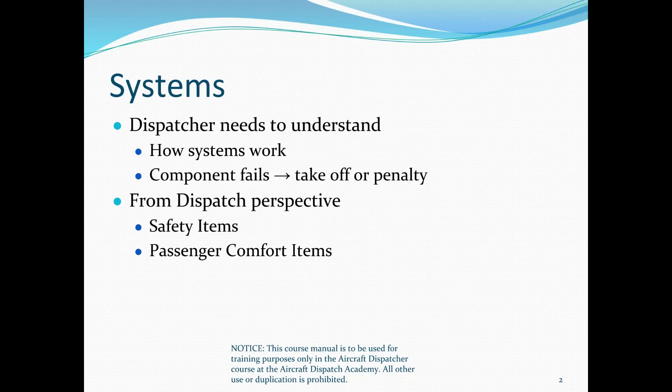So there's certain penalties that affect primarily us dispatchers as far as these failures go. There's times where we actually have to apply something or adjust our flight planning in order to compensate for the failures. So they kind of separate them into two lists of things: is it passenger comfort, or is it a safety of flight issue?

So for bleed air, we talked about this yesterday. It's used for pressurization and anti-ice. When you turn the bleed air systems on, it's like we said yesterday, it's taking that air that's flowing around the engine off the engine. So when that happens, we have a loss of thrust. The engine doesn't produce as much thrust because we're pulling that air off to power those systems.

So the importance of that bleed air is that when we turn the anti-ice on, which prevents ice from adhering to the aircraft, it's a good thing, but it also affects our takeoff roll. We take a weight penalty for it, and we also have altitude restrictions, no icing if it goes out. So it's a pretty bad scenario when those pneumatic systems and the bleed air systems go out of service.

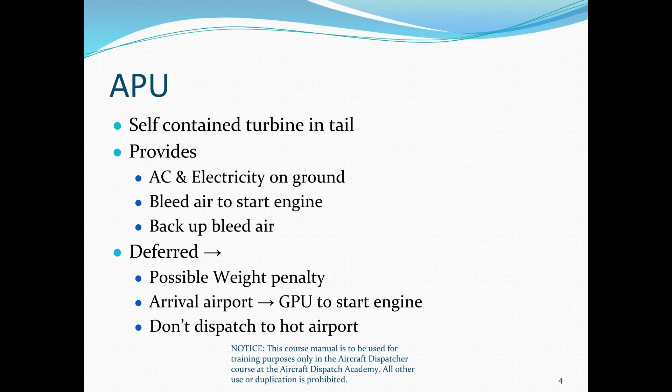We don't have that backup power, but we also don't have the air conditioning on the ground. So it's a pretty bad day if you're in Phoenix and it's 115 outside and you don't have that AC running on the passengers.

So the AC packs, once again, provide that pressurization. The bleed air is routed to the pack and removes the water, then it provides that AC and pressurization centralized in the pack. One pack can basically take over if there is a pack deferred, but if there is one pack deferred, that restricts the altitude we can fly up to.

So we'll take performance penalties, we'll take fuel penalties, basically performance kind of equals fuel, right? If we're flying down at flight level 200 instead of flight level 320, it's a huge performance hit, so we're going to be burning a lot more fuel down low. And the air conditioning's not as effective.

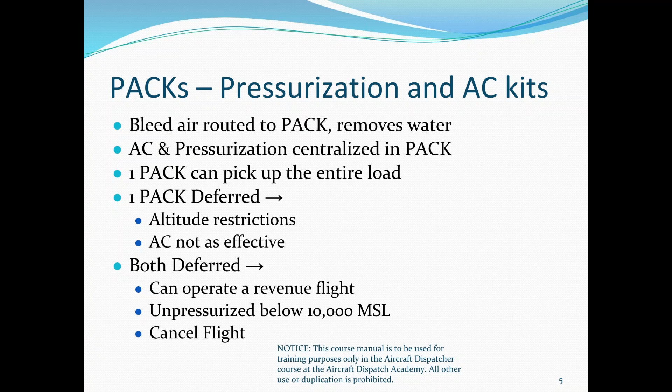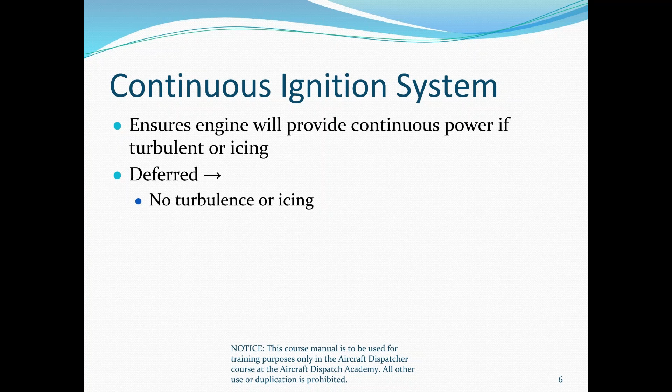So the CIS, or continuous ignition system, ensures the engine will provide continuous power if turbulent or icing. If it's deferred, basically we can't go into known turbulence or icing. So, pretty bad day.

As far as the electrical goes, like I said before, the IDG, integrated drive generators, we always have to have at least one working. That's pretty important. When one is deferred, the APU has to continuously run in flight to help manage the electrical load.

We take a huge performance penalty, and there's an altitude restriction. For the 200s, it basically restricts us—we can't start it any higher than 31,000 feet or 29,000 feet, I can't remember. And then we have to fly it like 25,000 feet once it's on.

So if we have an IDG failure in flight, they've got to get down to that 25,000 foot mark, or else we get additional failures on top of that. So APU, IDG, pretty important parts of the aircraft.

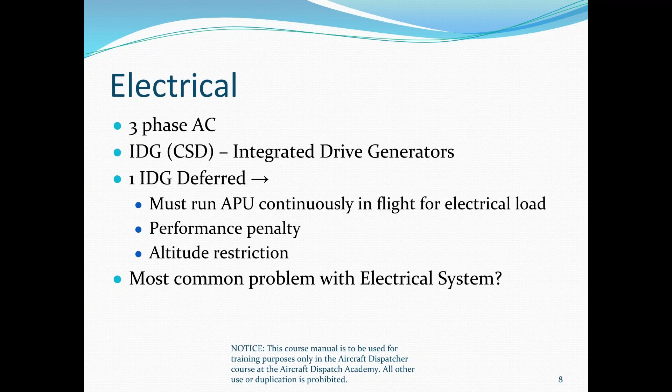As far as the fuel system, if that single point refueling mechanism is deferred, which it can be, like we said yesterday, you have to do over the wing fueling, and you need qualified people to do that. You need ladders, things like that. So some airports don't necessarily carry all of that stuff, and you need to make sure we're equipped to refuel the aircraft if there is a deferred single point refueling system.

And then, like we said before, you can't fill the center tank if that single point refueling valve is deferred. So we take fuel penalties in that case.

We can have navigation equipment, other equipment in the cockpit deferred. Here's kind of the penalties. For our weather radar, we can't dispatch into thunderstorms or hazardous weather. If our FMS is deferred, we can't use GPS, which means no RNAV routes, no GPS navigation at all.

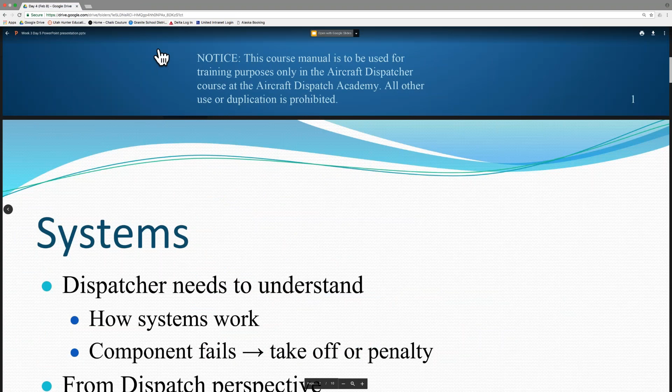All right, so let's see. So now we're going to take a look at this MEL CDL manual. What's a CDL? Does anybody know?

Can't remember. Jordan, do you know what a CDL is? I don't think so, I thought it was a license to drive a semi truck. Close, you're not wrong in that answer. There we go, Evan's got it.

Configuration deviation list. So basically it's telling us what can be missing. An MEL is a minimum equipment list, which tells us if this isn't operating, this has to be working. A configuration deviation list means that, say there's something structural with the aircraft, or there's certain seals that need to be on the aircraft. A configuration deviation says there's this many seals that are allowed to be missing out of this many, and if that happens, then you have to take a weight penalty here, or things of that nature.

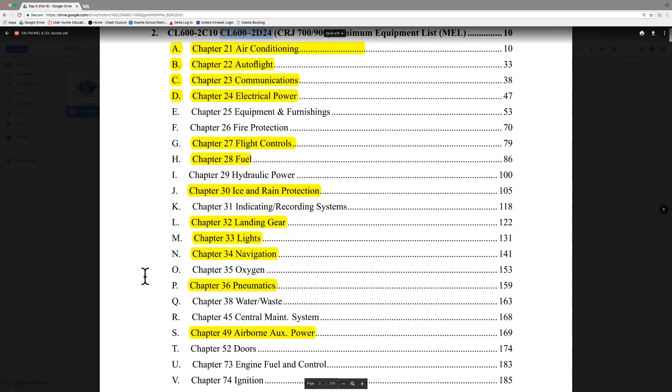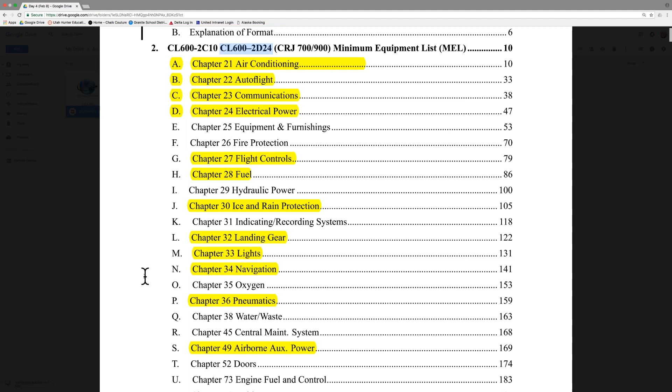This kind of goes through - this is when you're doing dispatch. This is going to be one of your favorite parts of every book, this index, and it tells us what chapters cover which parts of the aircraft. The ones that we highlighted here are 90% of the time going to be the ones that when we start flight planning, if we give you guys an MEL, these are the chapters that you'd go to find those MELs. So when we start flight planning, you guys will become very familiar with this manual.

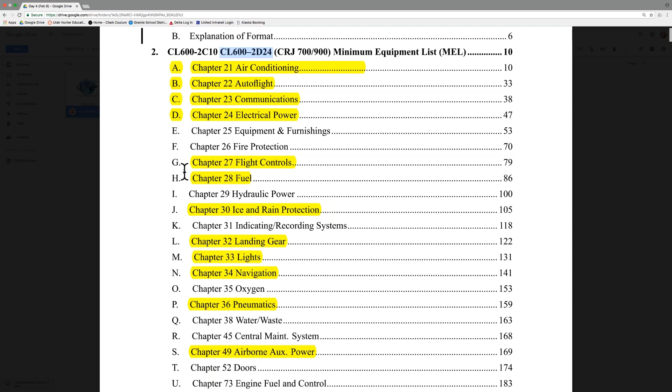On your practical test, a lot of times it depends, but you could be given any one of these, any list of problems, and basically you have to make sure you apply them, because if you don't apply the MELs correctly, that's a FAR violation and could mean an automatic fail. It just depends on what it is. Not to scare anybody, you guys will be so good at flight planning that it won't be a problem.

So this just kind of goes over an explanation of the format of the MELs. We're going to go over this. The system numbers, or MEL block, are based on the ATA specification number and numbered sequentially. Kind of common sense.

If there is a bold Cat 2 in the box with the item deferral list of the system, it also requires us to downgrade from a Cat 2 status. This doesn't apply to you guys as much because we won't be doing Cat 2 approaches in this class. But basically what it's saying is that if there's a Cat 2 in bold letters on the MEL box, then there's a penalty or restriction that means we can't do our Cat 2 approach.

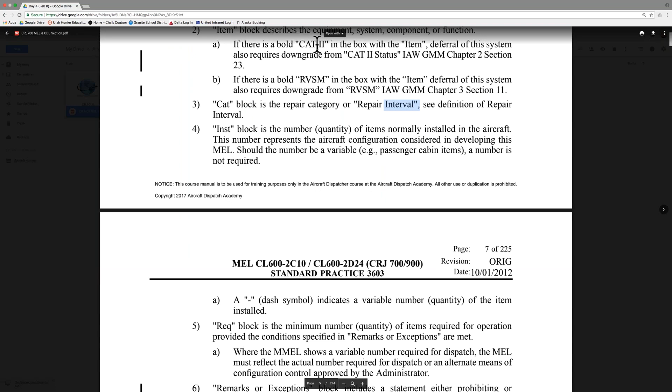And the same thing goes with RVSM. So if you see an RVSM or a Cat 2 on the MEL, that means you won't be able to fly that approach or fly in RVSM airspace. So just kind of skim through this.

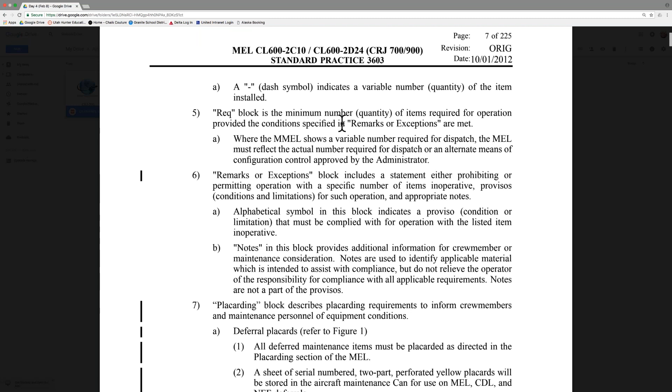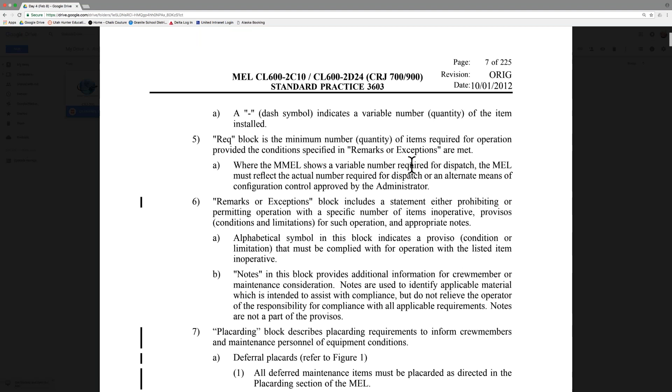So the required block is the minimum number of items required for the operation provided, and the conditions specified in the remarks exceptions are met. We're going to take a look at some of these blocks, but basically all this is saying is that if there's multiple systems on the aircraft, like 2 IDGs, it will notate how many of them have to be working in order to be legal to dispatch.

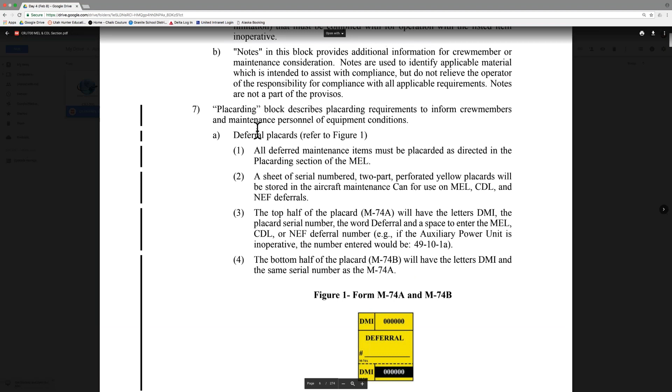There's a remarks or exceptions block that includes a statement of either prohibiting or permitting operation with the specific numbers of items inoperative, provisos for such operation, and appropriate notes. So basically it's saying that there's a block that we'll see that will tell us what maintenance has to do, in order to keep the aircraft operating, whether that's put a tag on something, or if it's a seat, put a sign on the seat that says don't sit here, or whatever it is.

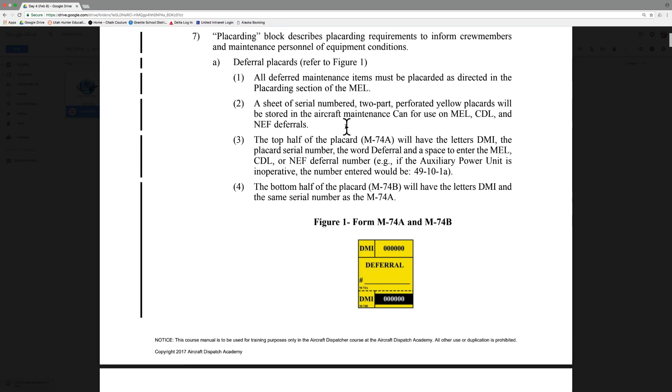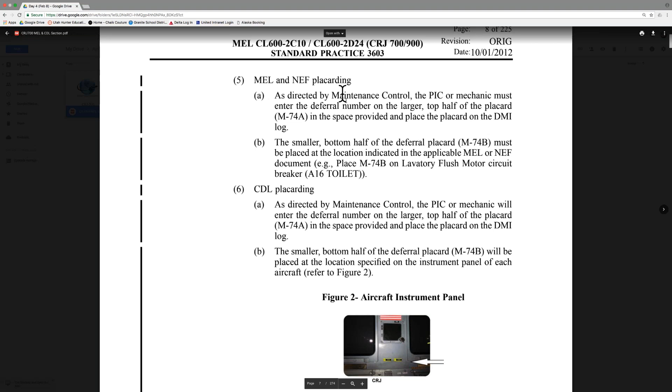So placarding, it also has a placarding box that we'll see, and it'll tell the maintenance people what sign, what form they have to use in order to indicate that the item isn't working. Yeah, this just kind of goes over the maintenance steps as far as placarding and CDL steps. So not too pertinent to what we do.

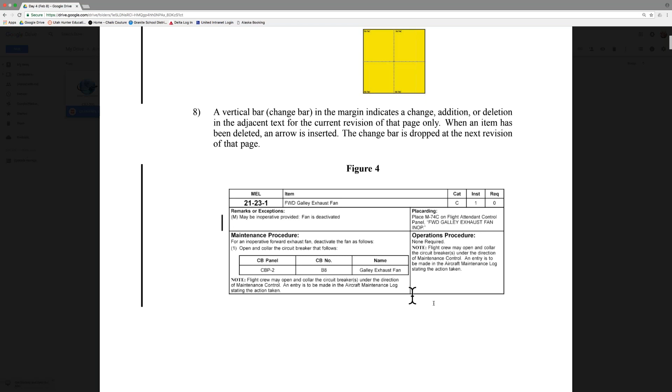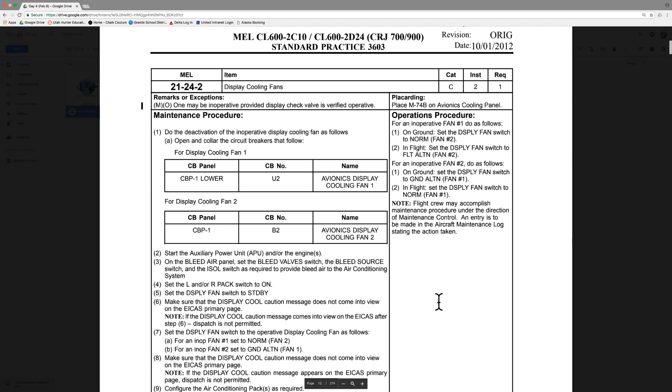So for this MEL, operations procedures is where it'll tell us certain penalties or restrictions that the flight crew needs to follow in order to operate. So these are our MELs. We'll just kind of hit a couple of these MELs, take a look at them. Let's see. This one's kind of interesting.

So these display cooling fans, these are for those PFD, MFDs. Some of the interesting things that happen is in the QRH, the pilot's operating handbook, or the quick reference handbook that the pilot carries with them. Basically, if one of these fans goes out on the back of the display, they have, I think they said 30 minutes to get the plane on the ground. Kind of interesting, because if one of those displays goes out, it's a pretty bad day. Pilot has to be able to see the instrumentation, right?

Here's one that takes a penalty: the automatic cabin pressurization controllers. As we said before, there are penalties and certain things we have to do, and it's going to be in this remarks and/or exceptions box. So for us dispatchers, what we have to apply to the flight plan is basically operations are conducted unpressurized at or below 10,000 feet.

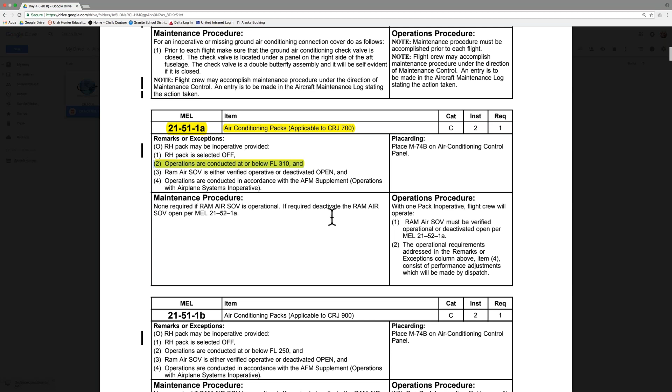Does anybody have any questions about these so far? You guys are seriously like the quietest class in the history of dispatch school. My boyfriend usually comes home and takes a nap in the same room I'm in, so I try not to be too loud. You're fine, otherwise I'm pretty talkative. For me it's all new, so I'm just trying to take it in. That's I all hear you. Yeah, what he said.

Here's an interesting one, the cargo air valve. Basically it allows the airflow down into the cargo area, I believe that's what that's referring to. Yeah, the air conditioning, it allows the air conditioning down into the cargo bay. It basically says that if this isn't working, you can't carry animals down in that aft cargo compartment.

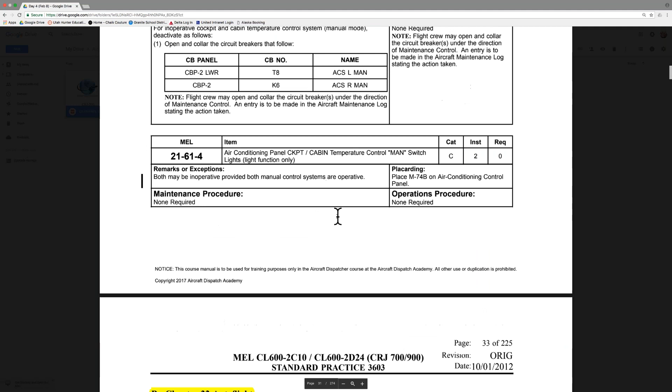Autopilot - so we see this note here. RVSM autopilot is required for RVSM. You can see here RVSM Cat 2 in big bold letters, so that's your first sign to pay attention to this MEL. But then we see this operations procedure as well: we can't do Cat 2 or RVSM, fly an RVSM, without an autopilot system.

The flight directors, once again, RVSM and Cat 2. You see that here, the Cat 2 flight directors. I know the flight directors are always tied to autopilot, but can't you also have flight directors manually flying?

Yeah, so the flight director is just that, it's just a guidance thing. You can see it here in this operations procedure: basically the pilot controlling the aircraft has to have an operative flight director.

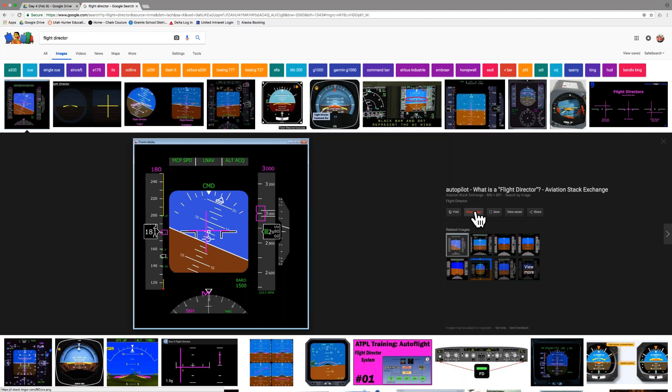There's little pink markers. I can pull up what a flight director looks like. So you can see here, let's make it big. If this is inoperative, these pink markers are what the autopilot is set to.

So if this display is broken, how is the pilot going to have reference to that? Not only that, but look at how much information this is supplying the pilot. Anybody that's flown a Cessna or anything has probably flown what we call steam gauges, which are individual manual gauges. But this is giving all the pertinent information for the flight.

This is our vertical speed indicator. This is our altimeter, this is our altimeter setting. This is our attitude, trying to remember what it's called in the steam gauges. This is basically our attitude situation indicator, I can't remember what it's called right now. This is our speed indicator. And this is our heading indicator. So this is quite a bit of information all in one little screen.

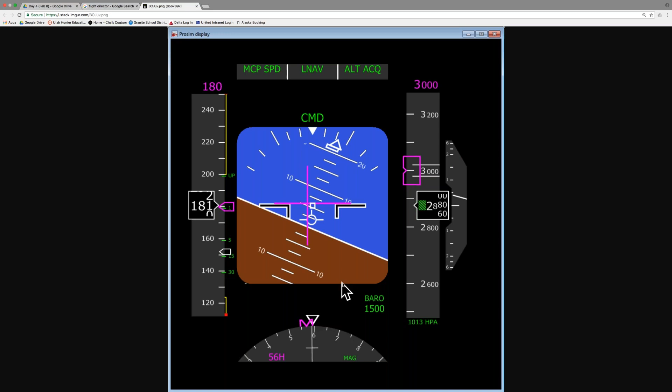Pretty bad if that goes out. The pilot has no references to where they're at. If one of these displays goes out prior to takeoff, we can't even take off.

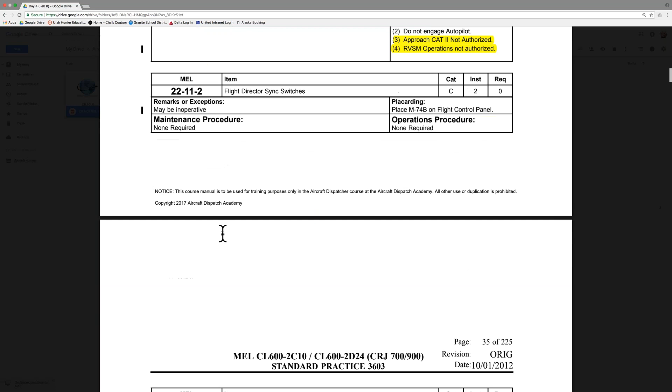Like we can't take off with that known issue. Once again, here's Cat 2 all by itself. Once again, the Cat 2 approach is not authorized. Yaw dampers. Category 2 is not authorized.

So our ACARS - if the ACARS is deferred, then like I said before, if one of our VHF radios goes out, we can use the ACARS system, the VHF radio that basically communicates our ACARS messages. The pilots can use that, and if that happens, then the ACARS is deferred. The way we would contact our pilots in that scenario would be with Delta radio, or Atlanta radio. Then it also tells us that our off, on, out, in times have to be reported by the gate pretty much. So that's how we get our information.

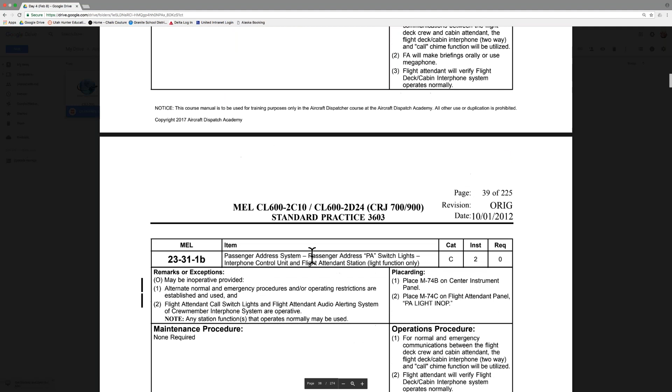You guys have any questions about these so far? Not yet. No, sir.

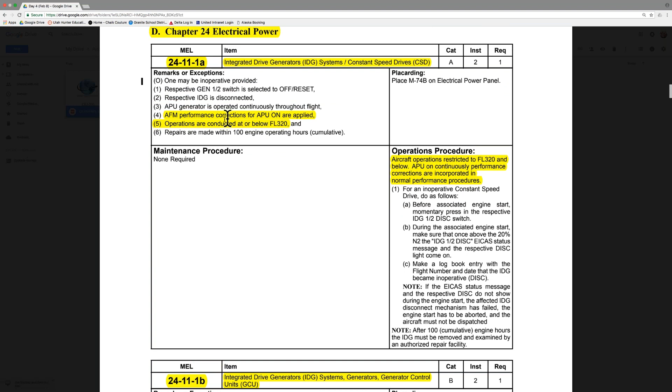So here's the IDGs. This says 320, I know that's changed, I know it's a lot lower than that now. That may be for the 200 though.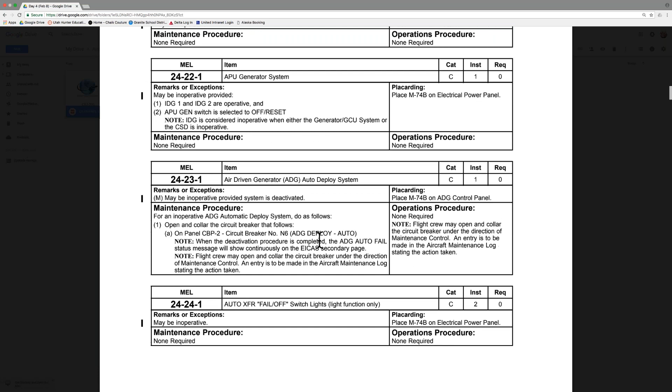So here's your APU. Your APU can go inop, but both IDGs have to be operative - that's pretty important - or air-driven generator. Just basically can't use the system. So, anyways.

It's kind of interesting. This just goes through everything, all these MELs. I mean, you can see how minor some of the stuff may seem, but like the flight attendant seat assembly - may seem minor, but there's a procedure that we have to follow if their seat is broken. So this tells us how to operate.

Just for application purposes, what's the most recent one you've seen at work that had a decent impact on you? Me personally, I can't think of any, but you get MELs every single day. Had a MEL - trying to remember, can't remember the specifics of it - the MEL basically made it illegal to go, so you had to swap aircraft at that point, or cancel the flight.

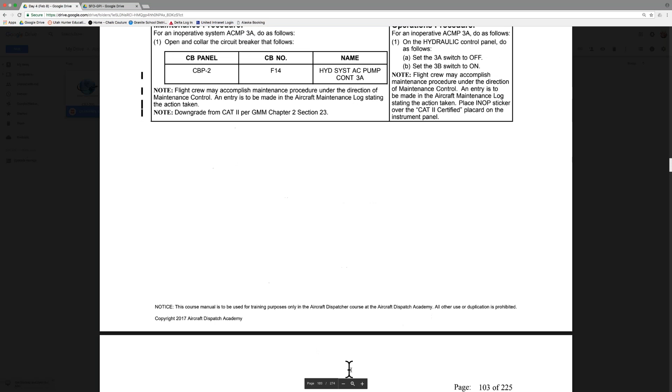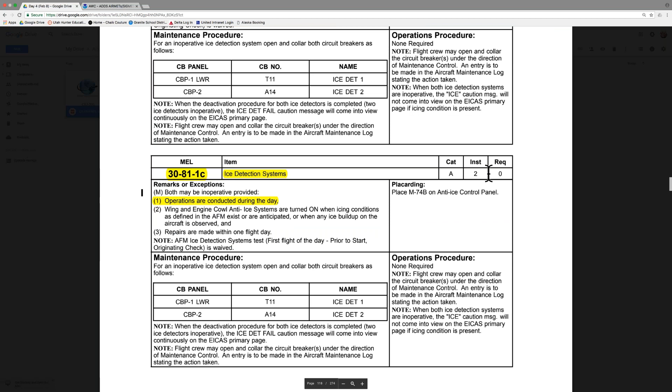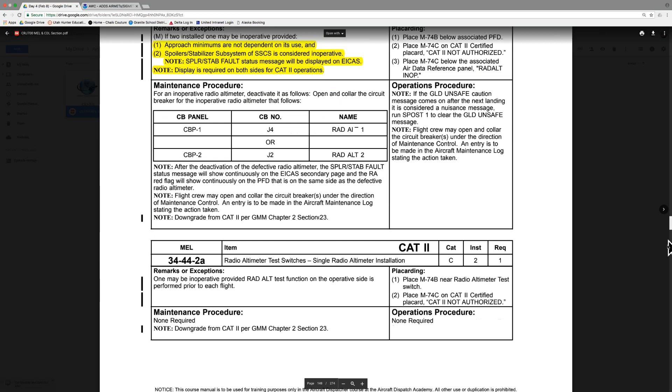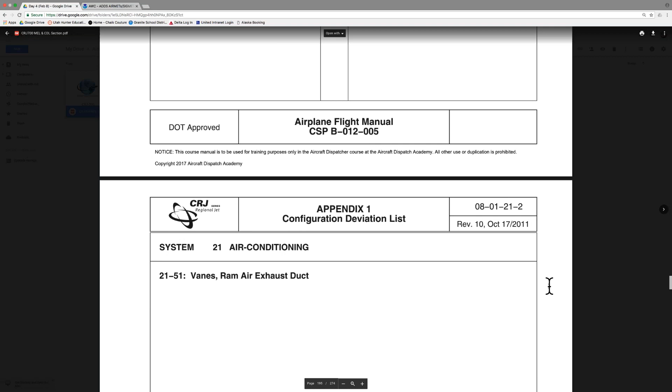So let's see if I can scroll a little more quickly down here. Let's see if we get some CDLs. Here we go. Nope, still in. I don't know where the CDLs are supposed to start. There you go, so these are your CDLs.

So this just kind of goes over our general limitations. The CDL contains additional limitations for operation without certain secondary airframe or nacelle parts. The limitations in flight in the AFM are applicable except as amended in this appendix.

The associated limitations must be listed or placarded on a placard affixed to the flight compartment on the instrument panel in clear view of both pilots. The pilot in command will be notified of each operation with a missing part by listing the missing parts on the flight or dispatch release. The operator will list in the aircraft logbook an appropriate notation covering the missing parts of each flight.

If an additional part is lost in flight, the airplane may not depart the airport at which it landed following this event until it again complies with the limitations of this appendix. This, of course, does not preclude the issuance of a ferry permit to allow the airplane to be flown to a point where the necessary repairs or replacements can be made.

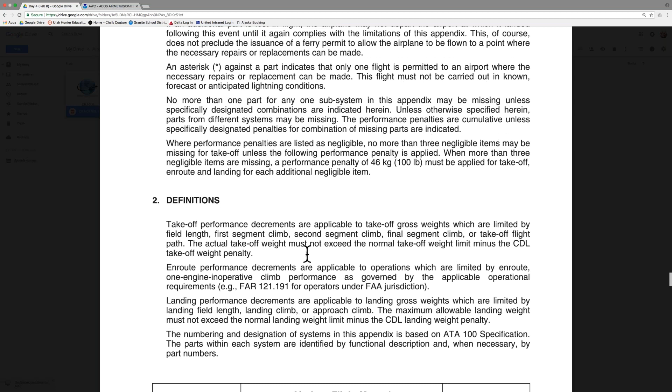But here's kind of an interesting part of the CDLs. When a performance penalty, or where performance penalties are listed as negligible, no more than 3 negligible items may be missing for takeoff unless the following performance penalty is applied. When more than 3 negligible items are missing, the performance penalty of 100 pounds must be applied for takeoff, en route, and landing for each additional negligible item.

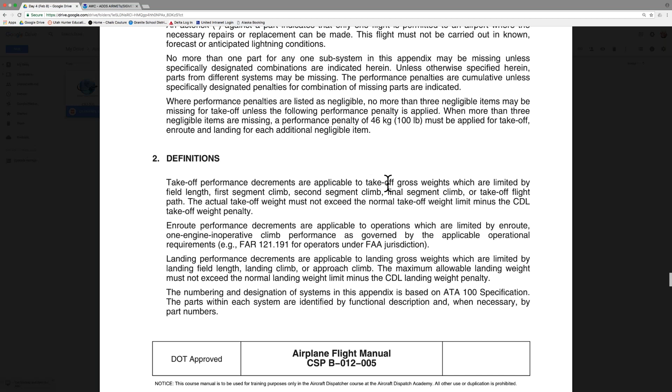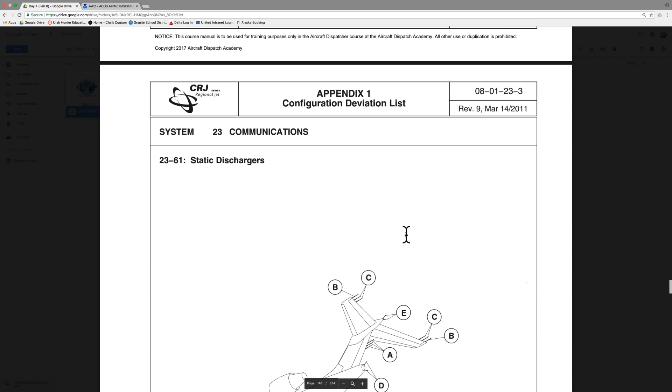So some of these CDLs, let's see if we can find one really quick. It'll tell us a weight penalty that we have to apply to the aircraft if it's listed as a negligible penalty.

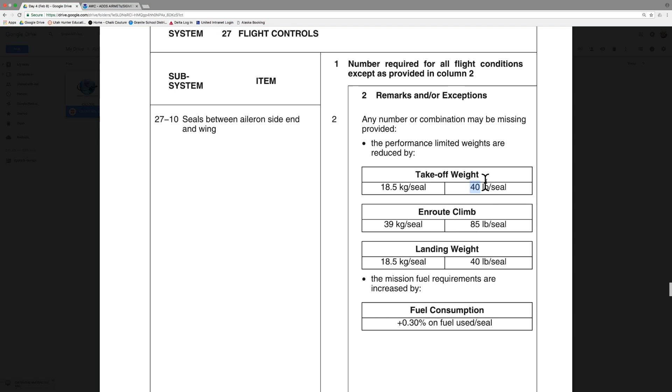So here's the seals that I was talking about. We have to take off weight into account that a certain number of seals are missing. We have to take off 40 pounds for our takeoff, and we've got to follow this. So our fuel consumption goes up by 0.3%.

So these are the penalties that we have to apply. But if it says negligible here, we can only have 3 of those and still have no weight penalties. As soon as we get a 4th one, even if it says negligible there, that 4th one, we take a 100-pound weight penalty. The 5th one, we take a 100-pound weight penalty. The 6th one, we take another 100-pound penalty. The 7th one, we take another one.

So it can add up pretty quick. Personally, rather than having a 100-pound weight hit, I'd like to take 100 pounds in fuel, or another person on the plane.

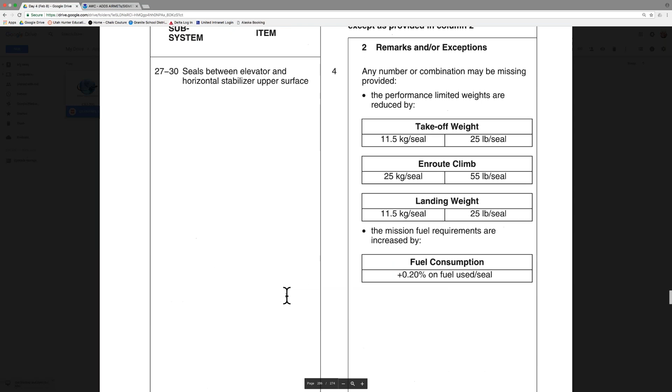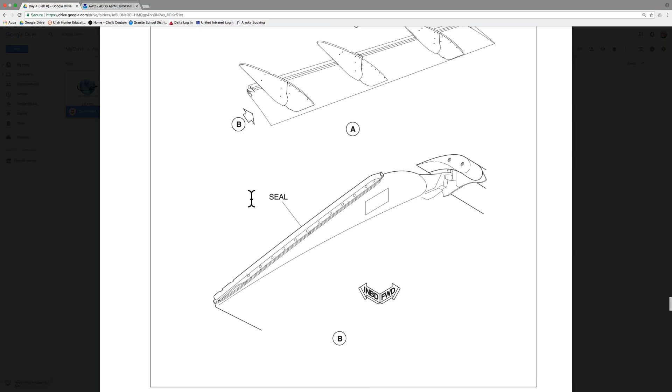Let's see if I can find one that says negligible. So the CDLs apply to the configuration of the aircraft, like the outside of the aircraft, the important parts of the airframe.

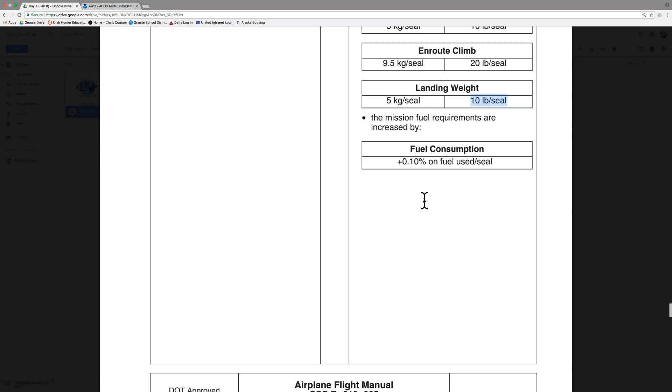Let's see, there's got to be one. See how it says even 10 pounds? Even if we had 3 of that, it's like no weight hit. Taking a 100-pound penalty is pretty bad.

So here, any number or combination may be missing with no performance penalty. If we're missing 4 of those, we start taking 100-pound hits every one. So the first 3 are free.

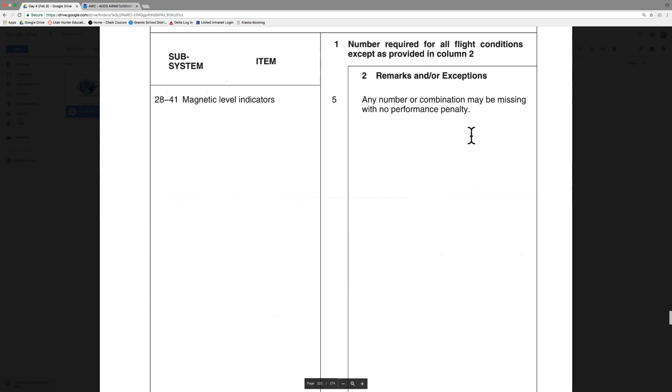Anyways, this manual will go through. I don't think we'll have you guys apply any of these CDLs to your flight planning. Just kind of important to know what they are. More for future knowledge.

You guys have any questions so far?

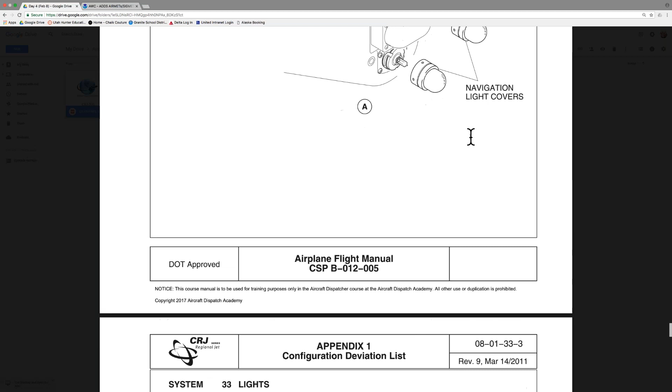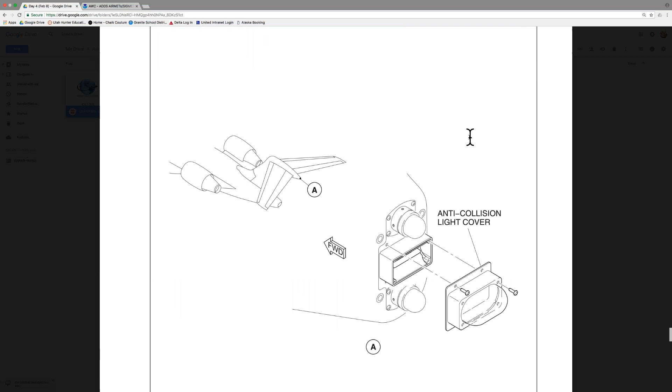So when you said just a second ago, you would sometimes have to either accommodate a passenger versus fuel versus just weight. So you would have, like, you wouldn't be able to add a total of the passenger and the fuel, or do you know what I mean?

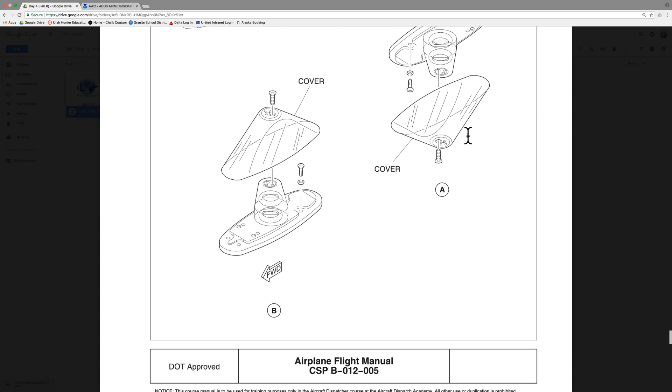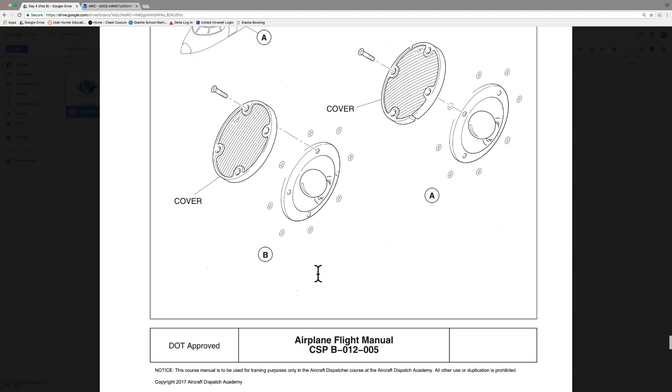Well, all I'm saying is that if these CDLs add up pretty quickly, and if we get enough of these CDLs, if we take 300, 400 pounds of CDL penalties, weight hits, for missing seals or missing screws or things like that, that all adds up really quick, and we start bumping passengers if it gets too bad. And me personally, I'd rather be able to apply those weight penalties to fuel and passengers than just taking weight hits because a seal's missing.

So, hey, Adam's on. Adam, I'm sure you have something to say about MELs and CDLs.

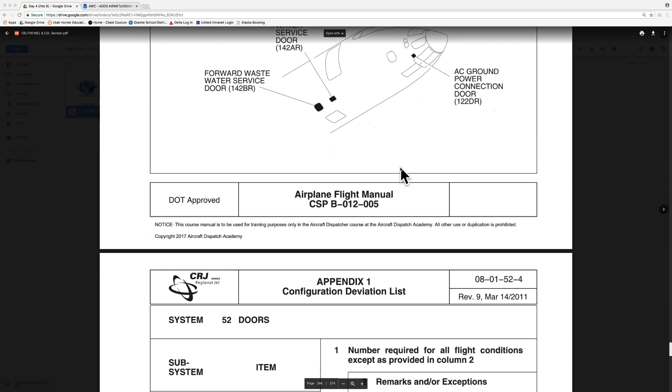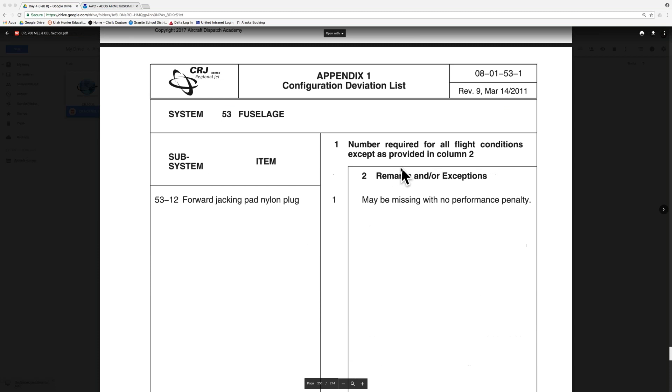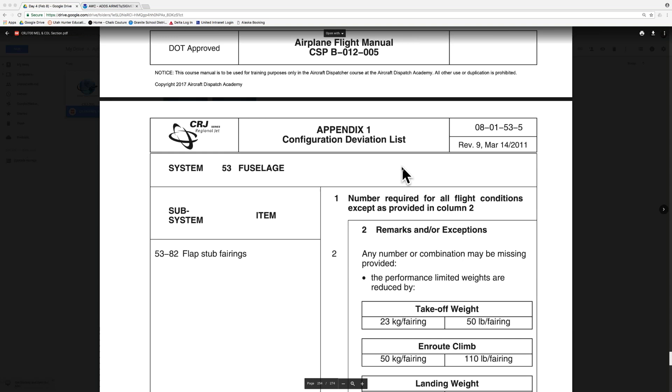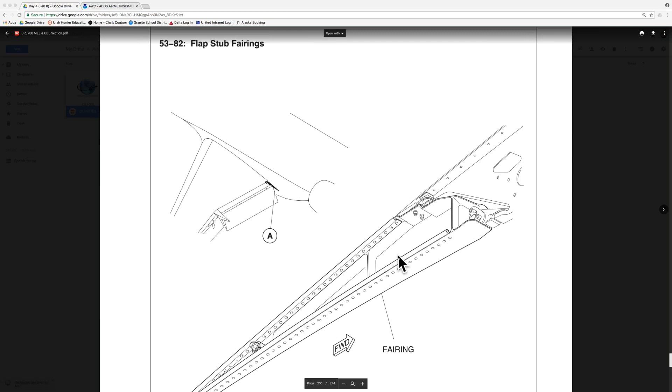He's probably not listening. He's Mr. Fun Killer now, he went to the dark side and joined the FAA. That's something my mom always says - I tell her something about the FAA and she's always like, oh, those B words, just relating to my situation. Now, I haven't met a real jerk of an FAA guy yet, and Adam definitely is not that way. I know a couple people who are in the FAA that are really nice guys, I haven't met one that was mean, but I know they're out there. It's the same with any job though, just protocol.

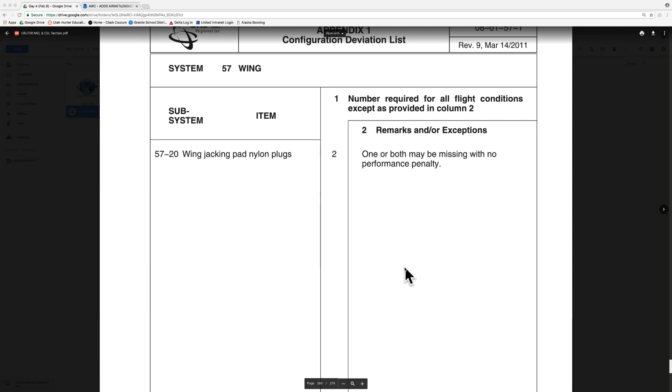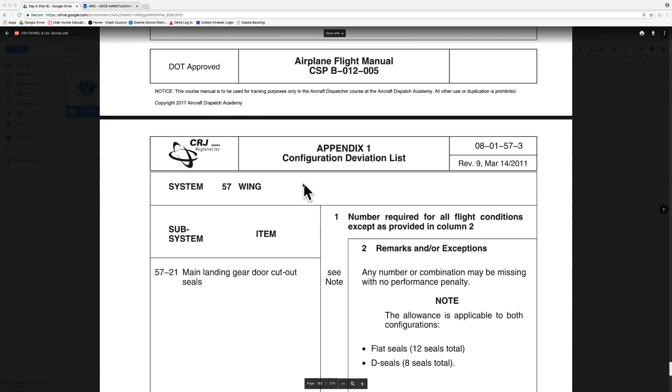So do you guys understand what these are? Basically, it's really important that we apply these necessary limitations or penalties to the aircraft because they directly affect our weight and our flight performance of the aircraft, and we really got to pay attention to these MELs. If we miss an MEL that tells us we automatically require an alternate, or we can't fly into RVSM airspace, and we plan the flight at 31,000 feet, and the pilot misses it, that's a FAR violation, and those fines can add up really quick. People lose their licenses over missing things like that.

Yeah, and I wouldn't want to be the guy that breaks, like you said the other day, 18 different FAR violations in one day. Well, that wasn't even in one day. That was pretty quick.

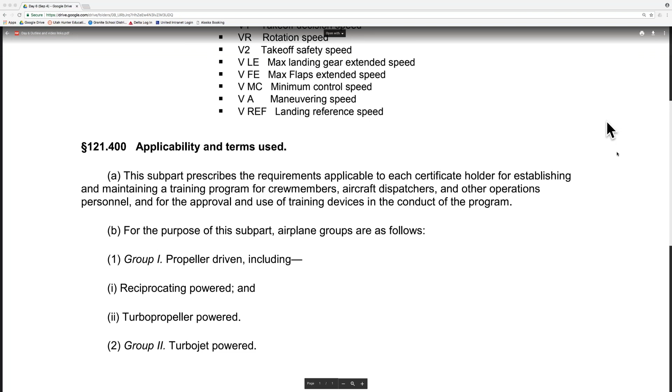7:10, we'll be back on. Are we going to want to memorize what those are and what they mean?

The three that you need to memorize and remember for sure are V1, VR, and V2. You will get asked questions about what is V1 speed, what is V2 speed, what is VR. VR is pretty easy to remember, but you definitely need to know what the V1 and V2 speeds are for the test. You need an understanding of what they are, but really you just need to be able to say V1 is our takeoff decision speed, V2 is our takeoff safety speed.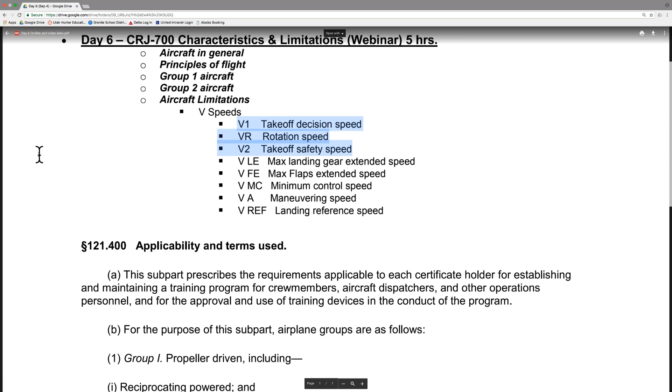So let's talk about Group 1 and Group 2 aircraft. When we talk about type of aircraft, say for jump seating, we're basically talking about whether it's a Group 1 aircraft or a Group 2 aircraft.

Back in the day, SkyWest used to fly the Brasilia, a turboprop aircraft, which would be considered a Group 1 aircraft. So back then when jump seating, you'd have to do 5 hours in a Brasilia and then 5 hours in a Group 2, or turbojet powered, aircraft - which would be your CRJs. But now, since we only fly Group 2 aircraft, that's all that really matters.

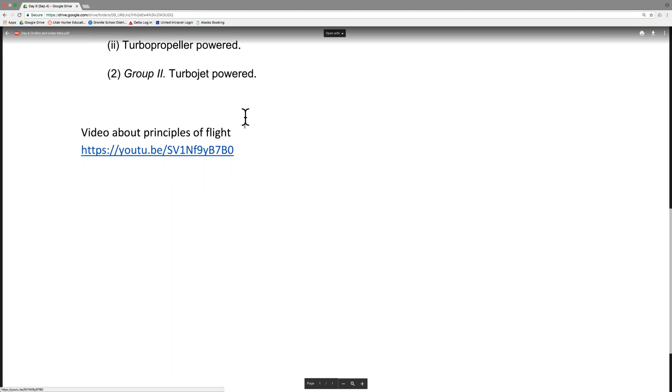We kind of talked, like I said before, the video goes over the principles of flight pretty well. For those of you tuning in after class and just watching this video, who weren't able to make it tonight, go into the Google Drive and look at today's lesson plan. It'll have this video link in there, and watch it. But does anybody have any questions on the principles of flight?

So I can't say that. So what principle of, or can anyone explain Bernoulli's? It talks about Bernoulli's law. Anybody want to take a stab at that?

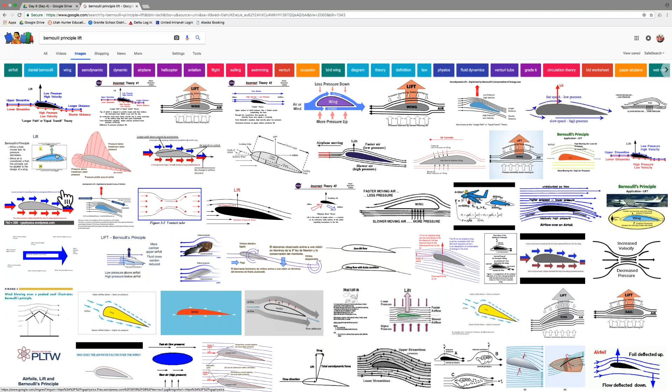The way I understood it was the air wants to stay traveling the same speed, but since it has to travel a longer distance on the top of the wing, it has to move faster, and the faster air creates a low pressure area, which provides lift.

Perfect. So this is kind of a diagram of exactly what you said. We got air moving over the top of the wing and down the bottom of the wing. As the air travels over the top of the wing, it accelerates, creating that low pressure, and then that basically allows lift. We see this as well.

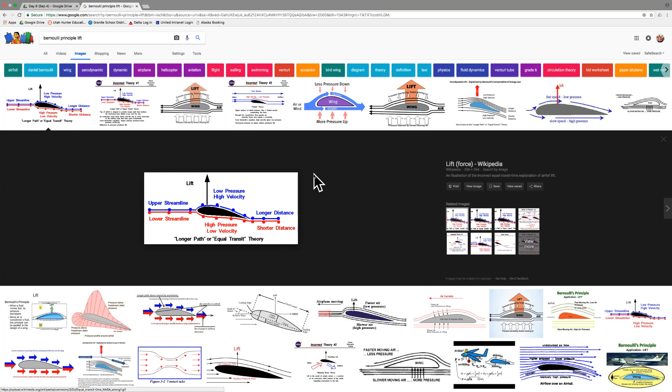Do you want us to write the definition down? I don't think you're actually asked for the definition. I just want you guys to have a basic understanding of what it is. But yeah, this is a diagram of the wing.

So when we talk about the wing, what's important, once again, you probably won't be asked any of these questions on a quiz or anything. But when we talk about the wing and the shape of the wing, everybody has seen the side profile of a wing, but we have certain reference lines that we've got to remember when we talk about these wings and producing lift.

So the relative wind is coming at us head on, right? So to produce lift, we change the angle of attack, right? So we call this the leading edge of the wing, but we change that angle of attack, and that will help increase the lift of the wing.

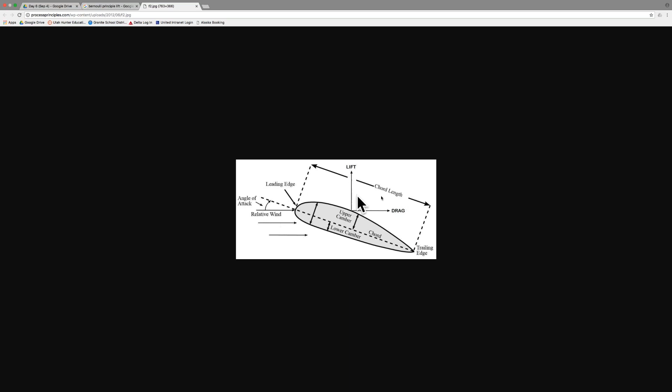Now, when we change that angle of attack too much, it'll start disrupting the flow of air over the top of the wing, and when that happens, we call that a stall. Basically, what will happen is the wind will come over the top of the wing here, and then it'll just kind of vortex off the end of the wing. So that's what a stall is.

But that's basically the principles of lift and how these wings work. Now that's going to be important when we're learning the aircraft because when we talk about the engines and compressor stalls, we kind of talked about it yesterday. The blades inside our turbines are wings themselves, little individual wings, and when they stall, it'll mess you up, as we so lovingly decided is the technical term. It'll basically stall out those turbine blades to where the engine just stops functioning and isn't producing thrust anymore.

MU is the acronym. MU. Yeah, exactly.

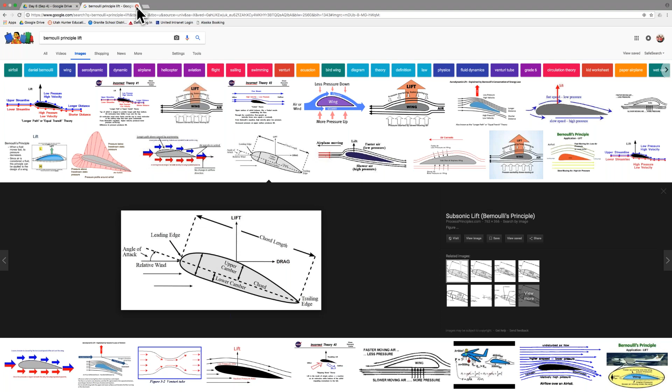But yeah, it's the same with an aircraft. When we're flying an aircraft, the pilot has to know these certain speeds because it affects the performance of the aircraft and his ability to control it and to fly. When we talk about ice on a wing, it changes the shape of the wing enough to disrupt the smooth flow of air over the wing. So when that happens, it changes the aerodynamic profile of our aircraft to the point where the airplane doesn't want to fly anymore and falls out of the sky basically.

So that video does a really good job of describing these principles and the general characteristics of the aircraft and how it flies and everything. But it's a good review.

With that being said, we've kind of covered the CRJ pretty thoroughly. Let's see.

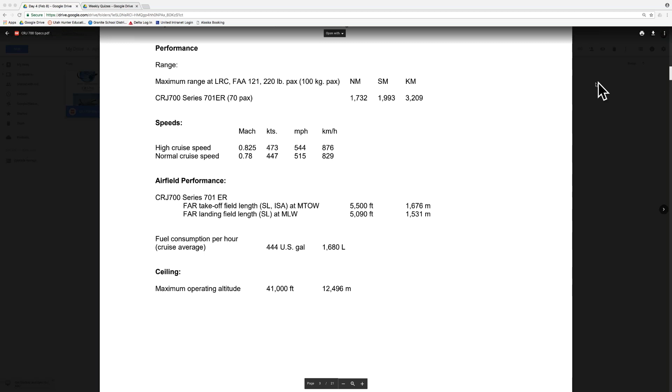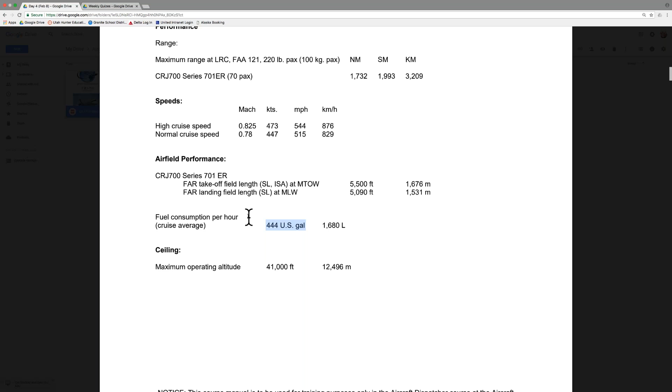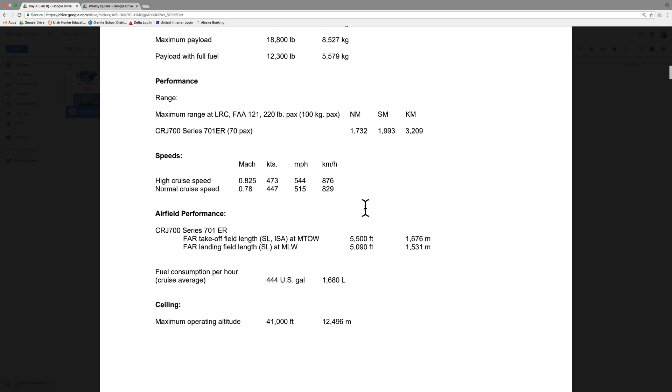Here's our average cruise fuel burn. When we're averaging our fuel for flight planning, there are specific fuel burns that we use to help us get a ballpark figure as far as how much fuel we're going to need for our flight. I'll tell you right now, it's not going to be that 444 gallons.

Hey Garrett, are you talking about the pounds? Total pounds of the cruise average? Yeah. I guess - let's see what that is in pounds.

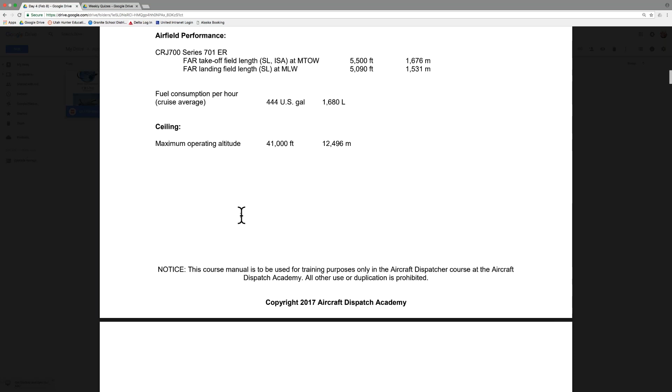What is it? Just remember, most of this stuff is just for informational purposes. The things you guys really need to know on this sheet are really just the weights at the very top, and even furthermore, really just the max ramp weight, the max takeoff weight, the max landing weight, and the max zero fuel weight.

The other ones are good to know, like for instance the max fuel load, that's good to know. The rest of them you don't necessarily need to have memorized, but those four highlighted are the ones you need to have memorized, absolutely, for sure. They're good to know as reference items, in case you ever needed them for any reason.

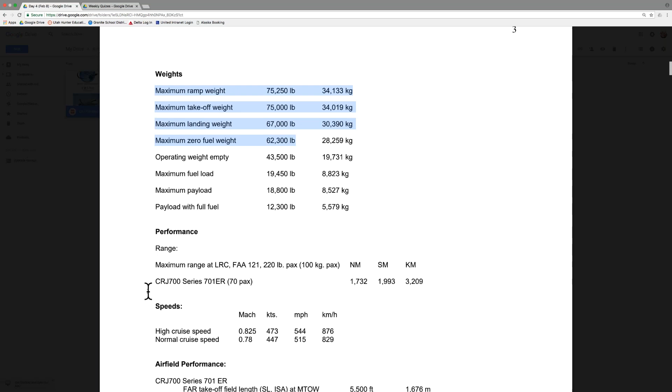But those four at the top play a factor in every single flight that you flight plan. That's why you need to have them memorized, because every flight you dispatch, and especially later on when you get into manual flight planning, they're going to play a role in every single flight you do. The other information may or may not. The rest of this is just more informational, just kind of a 'wow, I didn't know that,' just to show you the specs of the aircraft. But those four weights at the top are the things you really need to have memorized off of this sheet.

There's a lot of other factors that come in, like the fuel load and the fuel burn per hour. That can vary from flight to flight, simply based on wind and the payload factor of the airplane and all sorts of different things. The rest of the information is really just kind of an average, and it varies quite a bit from flight to flight, depending on the altitude you're at, the payload on the aircraft, and several other things.

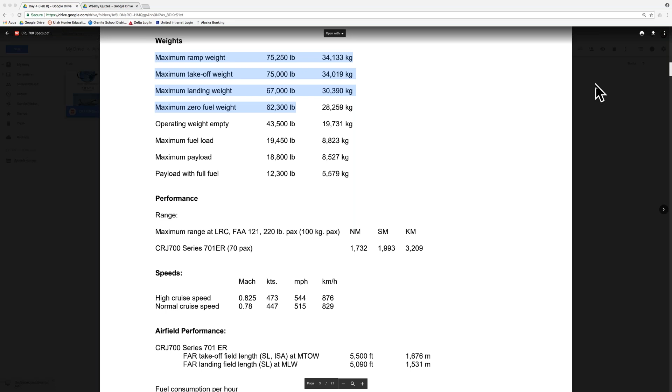It's like touching an iron, right? But yeah, it's important to remember, we call it wing anti-ice and engine anti-ice. And when we say engine anti-ice, more specifically, it's the engine cowl. We don't anti-ice the actual inside of the engine because it's already hot enough, right? But we heat this outside area, the cowling of the engine. So once again, that bleed air is pulled off of the 6th and the 14th stage of the engine.